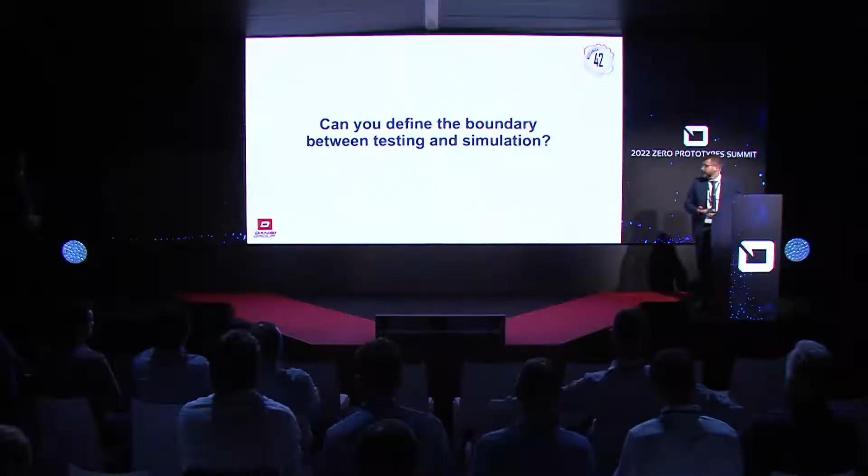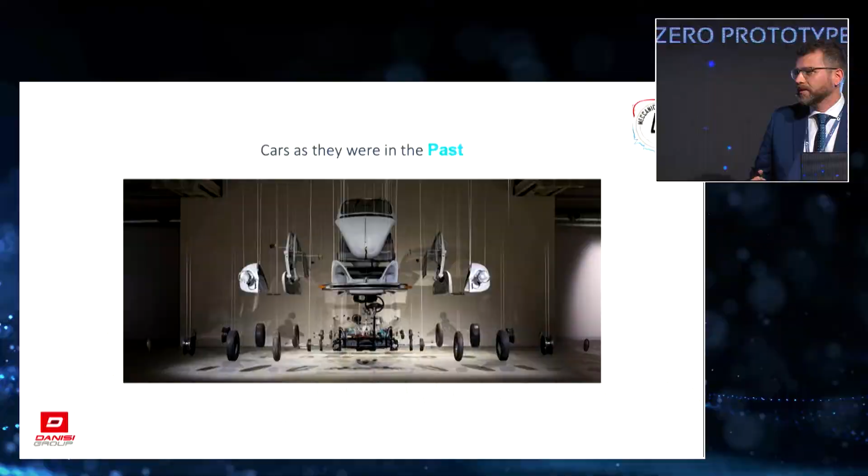In the past, vehicles were seen as a simple set of hardware components, and their integration was mainly important for target setting and performance assessment at vehicle level. There was no particular reason for real-time modeling because the simulation could be done on the single components without caring too much about the time synchronization.

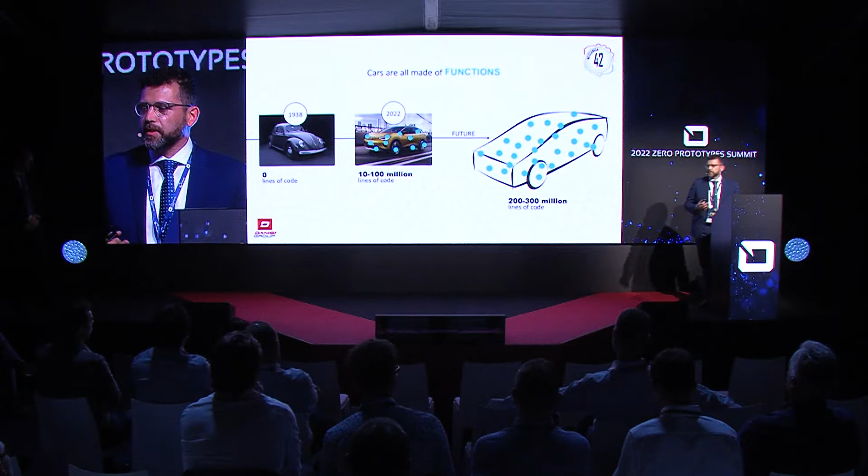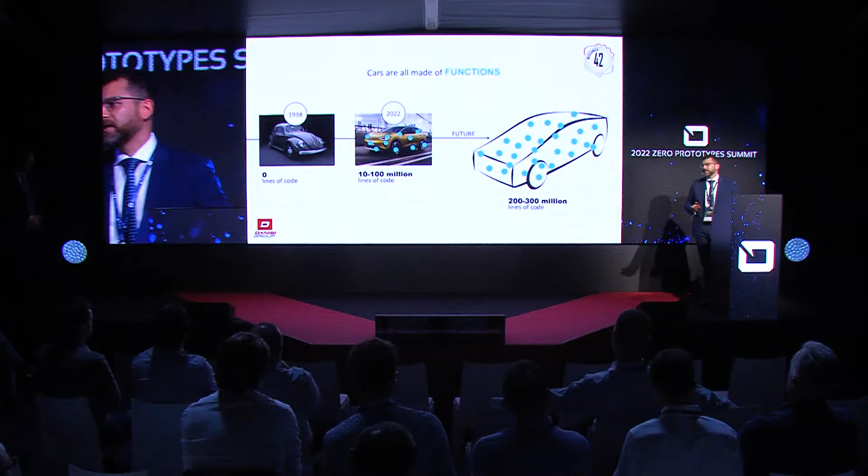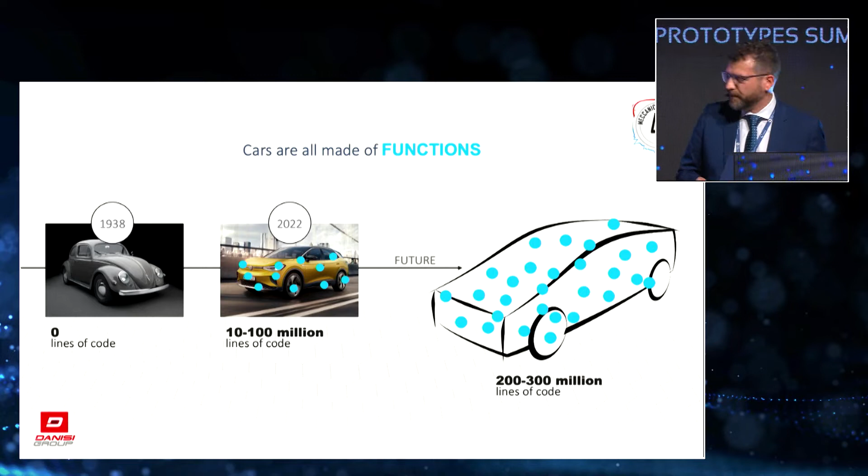So, if interactions are key for the vehicle, now the real-time models become very, very important because they can serve in place of the physical components in any phase of the development process, from proof of concept up to sign-off. And you can substitute the real components with the simulation, for example, testing different components at different readiness levels in the same place. For example, it is possible to test carryover components on a new concept of vehicle months before thinking of the first vehicle prototype.

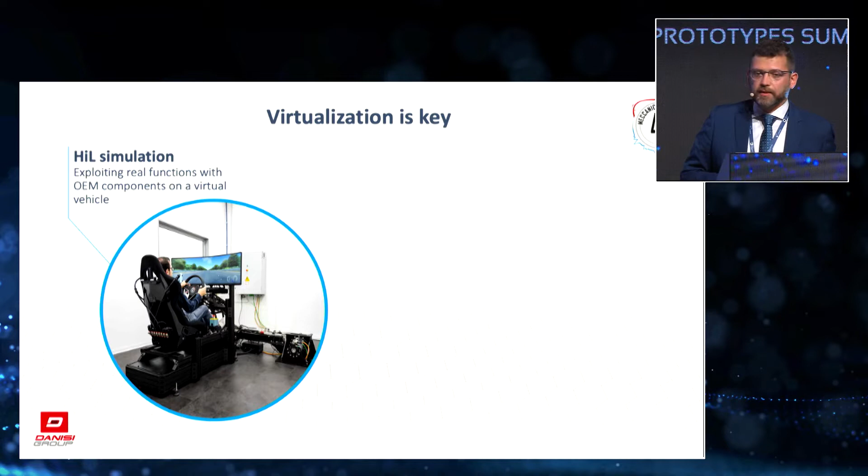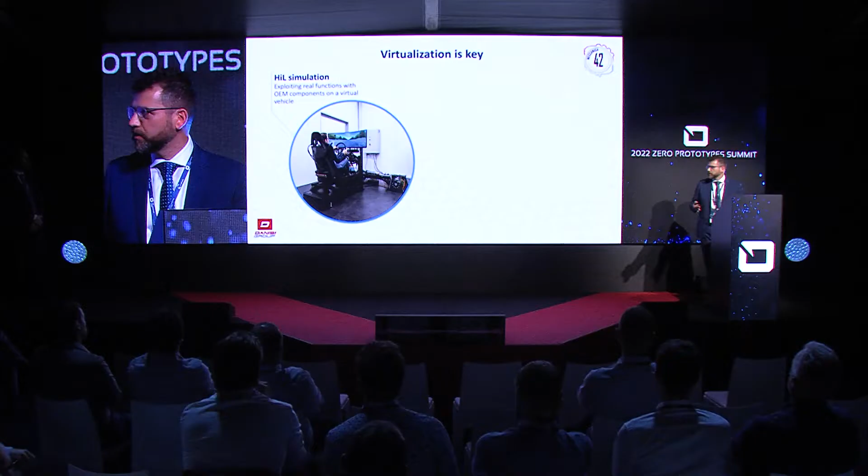This is the simulation station that we brought here in the booth of Meccanica42, just in front of the reception. Here you have a driver in the loop simulator with the steering system in the loop, the brake system in the loop, and the ADAS camera. In this setup, you can test all the hardware functionalities that are connected to the steering, the brakes, and the camera in the same scenario, with the virtual car and the virtual scenario with the physical components. So here the limit is quite defined between the virtual world and the real world. Here the virtual world is the car and the road, and the physical components are on the rigs.

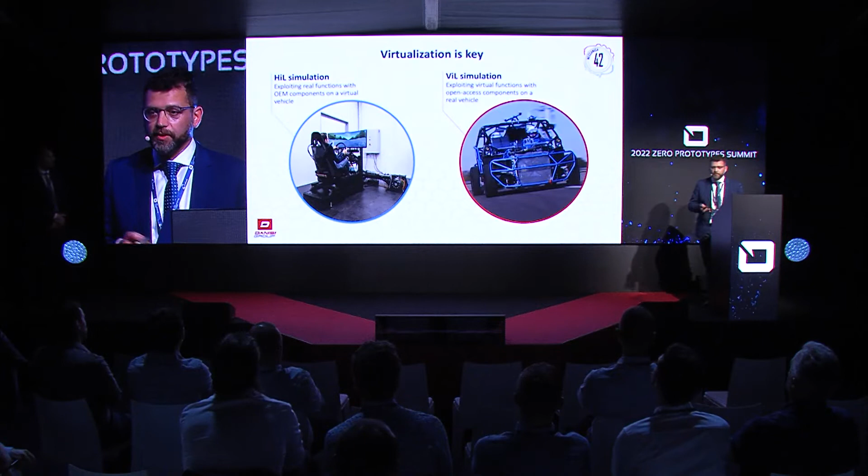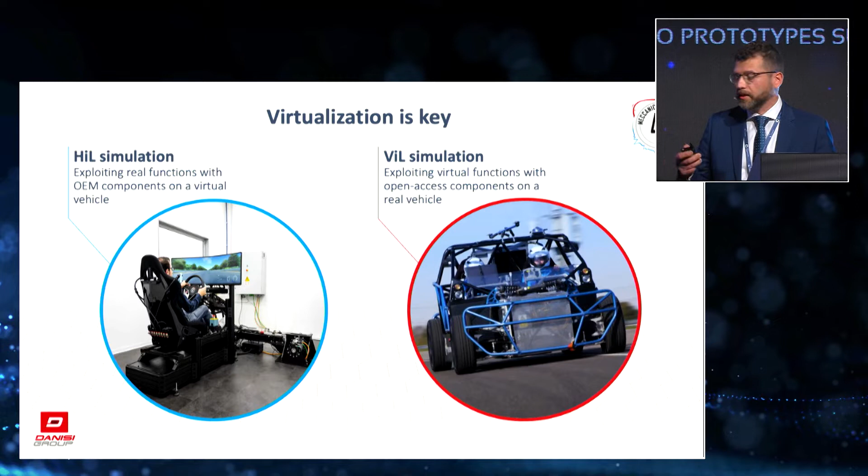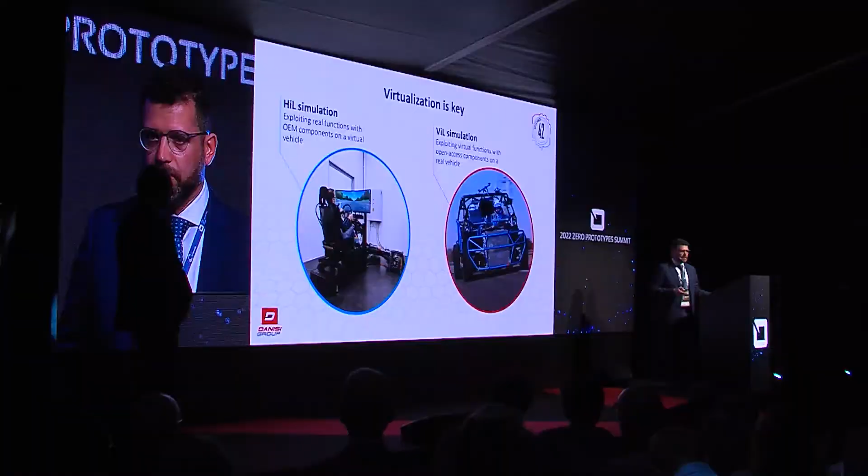The other side of the moon is the vehicle-in-the-loop technology. This picture is a good example of it. This vehicle has an open architecture in which you can change the kinematics, but also all the components installed on it have open access. So you can have the 4 brakes individually actuated by 4 electrohydraulic actuators, the traction provided by 4 different motors, and the steering provided by steer-by-wire on both the front and the rear axles. Here, again, the bounding line is pretty clear. The vehicle and the road are real, and the functions are virtually deployed on real actuators.

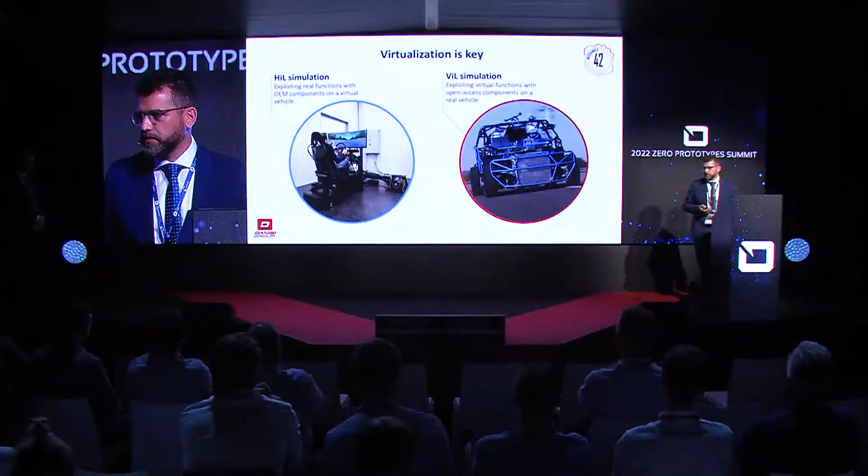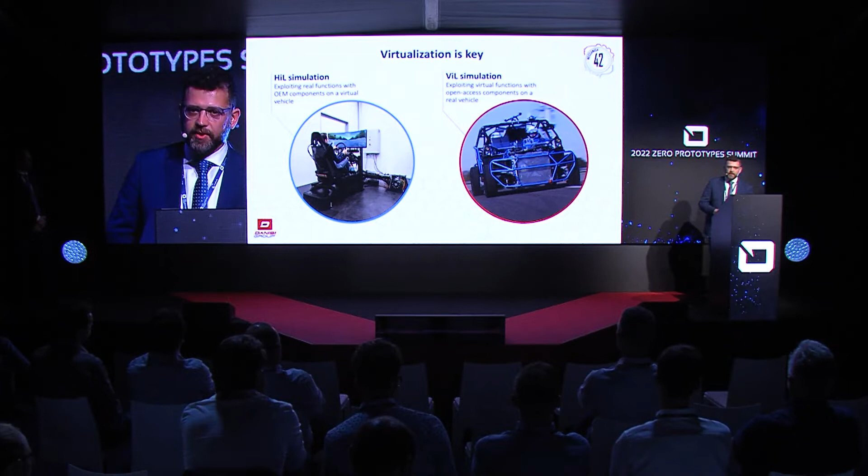So the answer to my question is yes, the limit can be defined between testing and simulation, and this limit is in our hands. In each phase of the development process, we can define which level of virtualization can be useful for our process. And after this, a question can pop up in our mind. Is it necessary to have all the components and the real-time computer, everything in the same place at the same time during the development process? Or is it mandatory to have all the components in the same city? Well, Marco will answer this question for me.

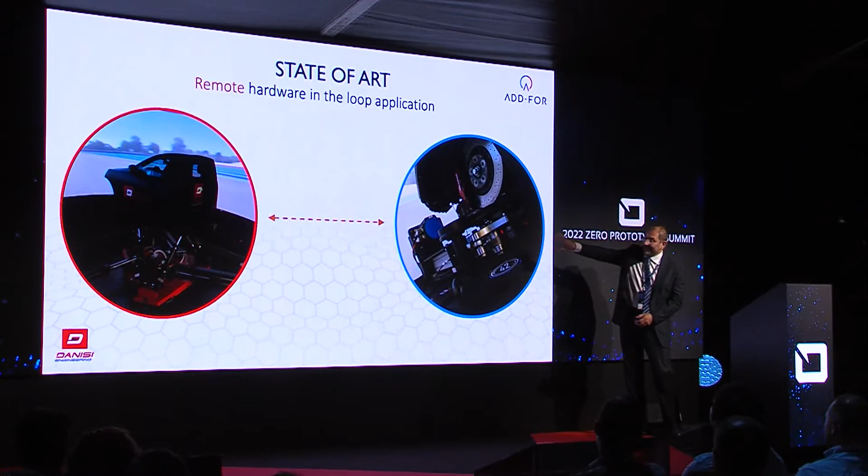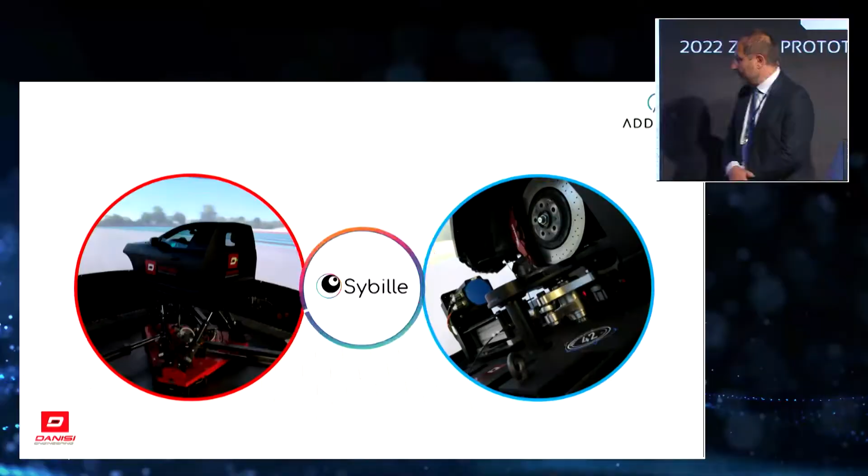In this way, the driver in the simulator can drive in normal, full simulation conditions and can drive the real components, which in this case is steering. It could be the same for powertrain, for batteries, for hardware in the loop, for ADAS, or other things. What we found out to be able to do, using a technology that I'm going to describe to you shortly, that we call Sybille, is put together these two rigs, even if they are not a few meters away but 100 kilometers

of distance between each other. Basically, what Sybille is doing is taking some input from, in this case, the simulator, and using all the input analysis to create a sort of virtual sensor that is a prediction of the relevant output for the other rig, forecasting by a few milliseconds in order to do two things: when necessary, to fill some small gaps of data transmission, but even more importantly, to completely cancel the delay, the latency of communication between two rigs that are not just one beside the other. And I'll show you one example of how this is done.

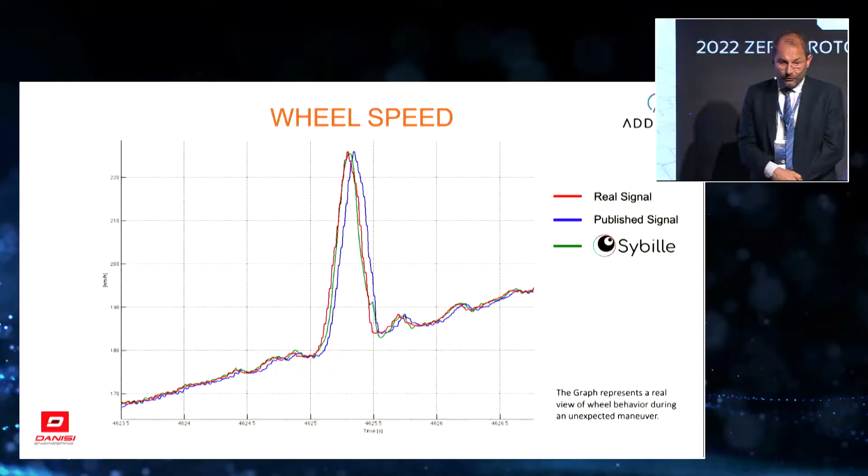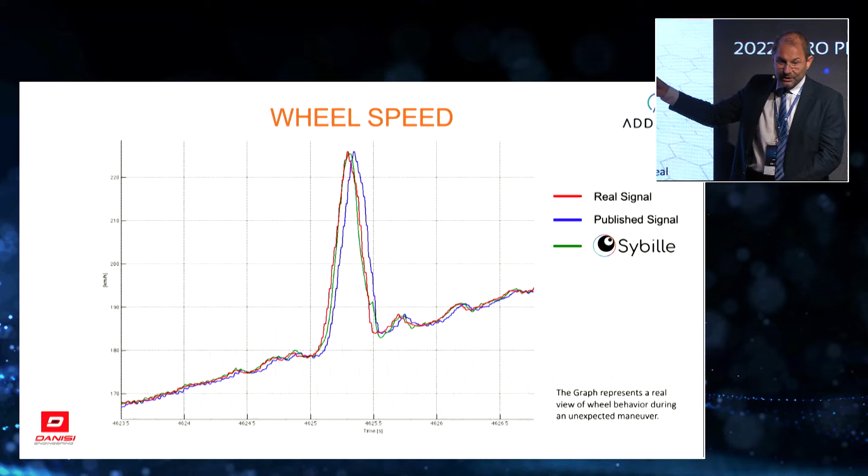We started a few years ago with Add-For in designing a virtual sensor for traction control. You can see here a real logging of the wheel speed of a car where the wheel is hitting a curb or a pothole. In red, you see the real signal. In blue, you see exactly the same signal delayed by 50 milliseconds, which is more or less what the ECU would see due to the latency of the communication between the sensor, the processing of the ECU, and the actuation of the traction control.

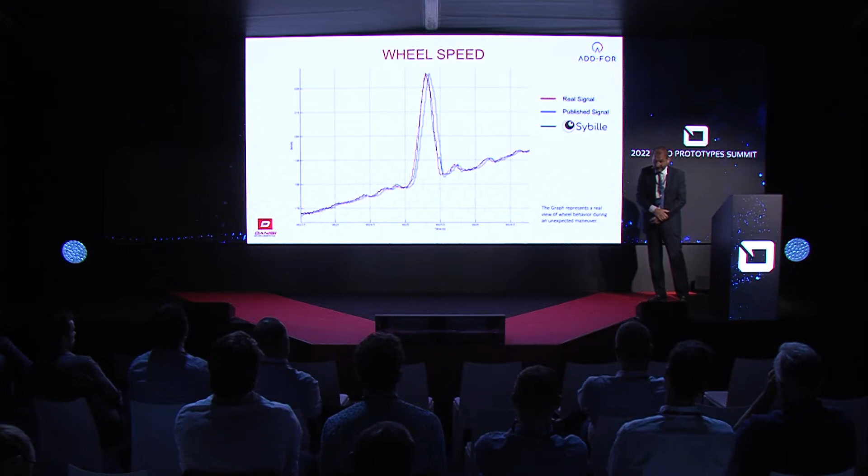And you can see in green a real-time calculation, not a post-processing calculation, of what a Sybille approach can do in order to anticipate the blue signal to the red, and in this way cancel the latency of, in this case, 50 milliseconds coming from the system. The result, applied to traction control in the car, is that instead of reacting only 50 milliseconds later with a heavy cut of the engine torque, we are able to have a very smooth control of the engine with much better results.

At a certain point, we started to use this same technology to connect different rigs in different towns. For instance, the example that we brought here, as you can see in the stand of Meccanica42, just behind where you did your registration today, we have a static simulator here where we can drive a model of the car, here in Udine. This simulator is driving a steering model in Torino, in Danisi, 550 kilometers away, which means that the simulator is producing steering wheel angle and load forces that are brought through Sybille to the test rig in Turin.

It drives without latency, because all the latency is cancelled by Sybille in the middle, and all the communication is checked by Sybille. The steering rig applies with the robot the same steering angle, applies with the actuator the same loads at the wheels, and gives back to the simulator the position of the rack and the steering torque of the wheels, coming back here in the same way. So the person driving the simulator here is actually driving a real steering system that is more than 500 kilometers away in real time. This is just an example. This could be applied to other things.

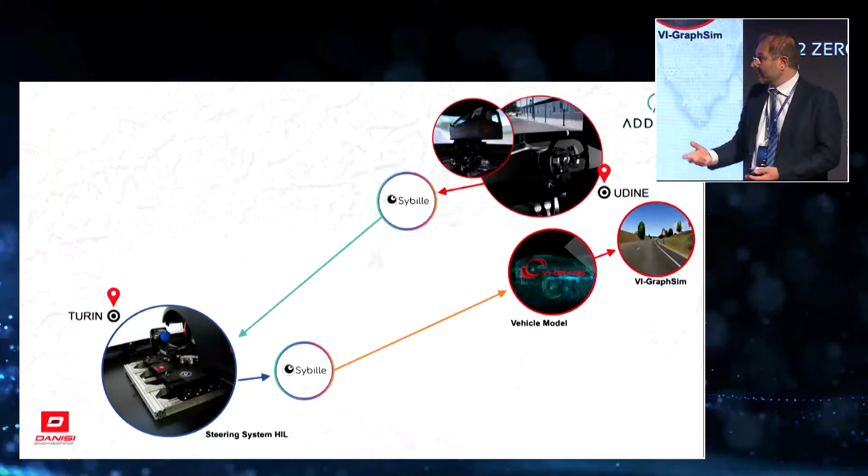Think about, for instance, running the simulators here, but having the vehicle model, the tire model, the powertrain model, or the real powertrain on a dyno in another place, at the tire manufacturer or the car manufacturer, without the need to come here, download the model, and use the model where you're using the simulator. You can have human, software, hardware in the loop distributed, where software and hardware in the loop of some components is no longer a product that you need to make available for the final user, but a sort of cloud service. This is all applied using a good normal internet connection, without the need of any infrastructure or any specific investment.

We believe that this is opening an interesting scenario of possible applications that need to be invented. It's something that we've been using at different levels for a few years, but now we want to share this kind of technology and understand what kind of applications you can think of. I cannot make you try here, unfortunately, but I invite you to visit, even tomorrow morning, the stand of Meccanica42, where our guys can show you what we're doing, and I will be there as well.

But I have a video where we show some examples of exactly this example, which is just one example, where with a dynamic simulator we drive a remote steering system hardware in the loop.